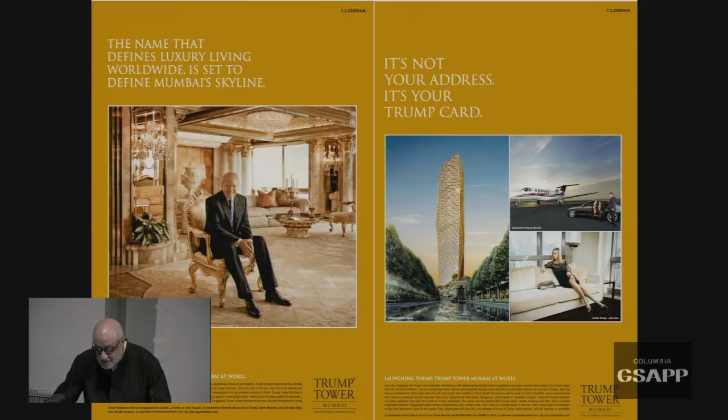Or even in the words of Karl Marx, who said about capitalism, to quote him: capitalism has conjured up such gigantic means of production and of exchange that it's like a sorcerer who is no longer able to control the powers of the netherworld, whom he has called up by his spell.

And even in Mumbai, we haven't been spared by this gold-plated, gilded Trump Tower. Spatial inequity is critical, and as Charles Correa, the Indian architect, wrote, to quote him: "Today the amount of urban space one controls is directly proportionate to one's status or income."

It has no connection to actual family size. In fact, poorer people most often have larger families. This space differential, therefore, cannot be justified in human terms and only in economic ones.

In Australia, in urban areas until at least the 1980s—something I verified a few months ago in Sydney—every family could have no more than a quarter acre. Australia was locked into spatial equality, and thus clearly a society that detests elitism.

But equity is not a quantitative measure alone. It has subjective dimensions of access. Sometimes perceived access, or an illusion of equity perhaps, is productive. Plot divisions that were the very fabric of a city are a great contributor to this, and by extension, architecture. This is what I think designers can play a role in defining.

Martha Chen, who works on informal economy at the Kennedy School of Government, advocates in the context of economy. To quote her: 'What is needed most fundamentally is a new economic paradigm, a model of hybrid economy that embraces the traditional and the modern, the small scale and the big scale, the informal and the formal. What is needed is an economic model that allows the smallest units and the least powerful workers to operate alongside the largest units and most powerful economic players.' This is a project I'll share with you in more detail as we go on.

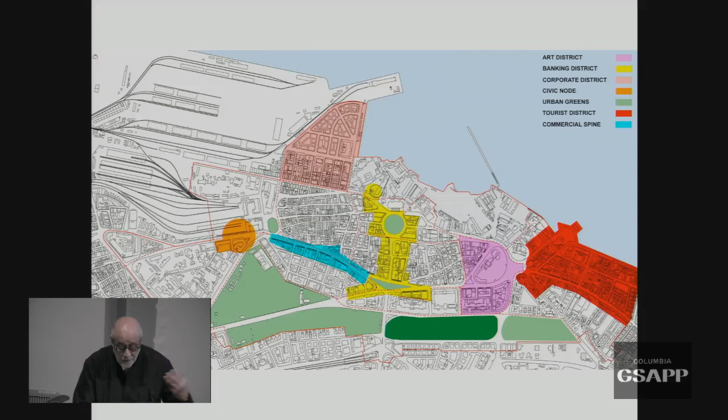And of course, they find their way also into advocacy. Here we worked as advocates for a whole decade, trying to organize citizens groups on the ground to preserve areas, to recycle buildings, to generate new economies for these places.

It also led us to looking here at the Prince of Wales Museum, a very particular precinct in the center of this historic district, engaging with architecture, contemporary interventions which were reversible, but transitional in what they were trying to do to the problem that exists. In this case, a visitor center, which became a gateway, which housed security and many other things.

At the other end of the spectrum, we're also interested in urban issues. As Ken was describing, this was a massive project across Harvard University that documented an ephemeral megacity called the Kumbh Mela, involved 7 schools, and landed up in this publication.

And then as advocacy also extended itself into the Venice Biennale as an installation to talk about these incredible landscapes which have become a reality in our world, all the way from refugee camps to places for celebration or the military. This has resulted in a very recent book called Does Permanence Matter?

And this maps about 300 cases of ephemeral landscapes such as this, with 3, 4, 500 million people on this planet spending their daily lives here.

And Andres Lepik took this and has now converted it into an exhibition at the Munich gallery, because in the conversations in Germany, this is something that resonates very deeply. It's a 5-month-long exhibition with many conversations around it, and a very beautiful installation.

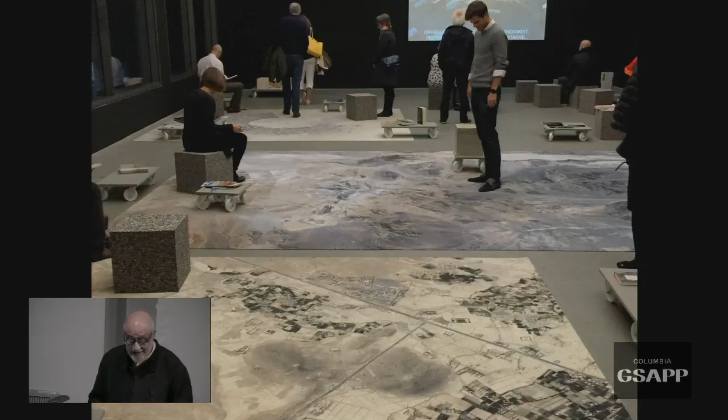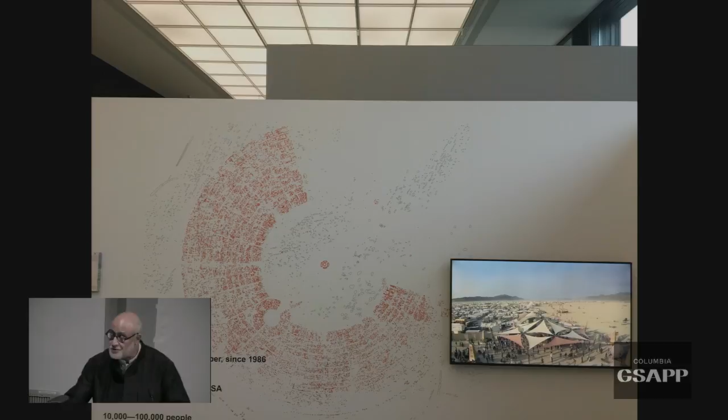These are carpets that were made locally there, which actually have maps of these ephemeral settlements that you can look at and sit around. We've also digitized things like Burning Man, and all of these settlements, so you can begin to pull the metrics into the planning discourse. So we can actually measure densities and measure distances. You can create metrics to understand these.

And this is extended now into a broader project, which is looking at urban India. In the present official calculus of the government, India has something like 7,200 and something towns. And we're making an argument that there are actually 32,000 settlements.

And it's a condition of flux, because the argument we're building in the research is India is 60% urban for 6 months of the year and 40% urban for the other 6 months. So the flux of 350 million people, how do you deal with that in terms of design? It has huge implications for housing, for example, and rental markets, even in the big cities, because you have a seasonal change that is mind-boggling.

In India we shouldn't be talking about smart cities, we should be talking about smart agents, because there are 350 million people moving between rural and urban, this blur where we can't even use those binaries any longer, making the biggest transformations in the landscape and culture of these settlements. But looping back to architecture, which is what I'll stick with, I wanted to use that as an introduction to talk about my spheres of concern as I come to my spheres of influence, I hope.

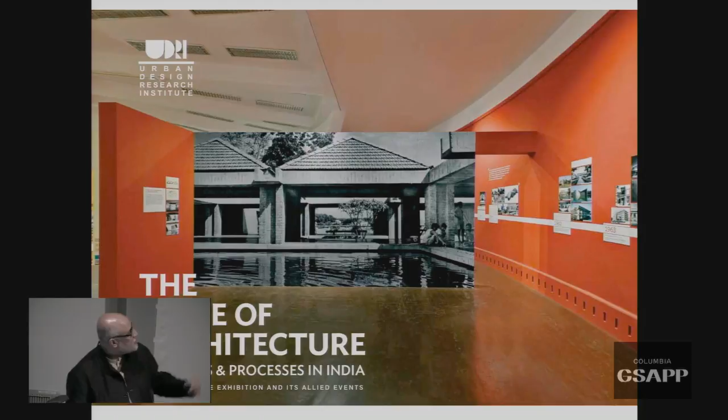From Ken's book, a decade later we made this book on architecture in India since 1990, when we liberalized our economy, because we began to see very particular patterns emerging. This became a major exhibition at the National Gallery of Modern Art two years ago, which mapped architecture in India since 1947. Many interesting things came out of it in my own learning. Besides capturing the seminal publications and things, this was a book that Ken did the foreword for.

At Independence, we had one school of architecture, which is this yellow line. Two years ago, we had 480 schools of architecture. It's an amazingly mind-blowing trajectory.

What you see in blue, from 1990 when we liberalized our economy, real estate became a more formalized sector, and you see the growth of schools related to the growth of real estate. Actually, the demand for architects is inversely proportionate to the growth of real estate, because when real estate becomes an organized sector, large developers build large gated communities using one architect, one landscape architect for multiple projects. So 600 homes get built by an in-house architect, often. In another paradigm, it would be a completely different economy as far as the profession goes.

So we shouldn't be having more schools of architecture, in fact, less. There were many things like this which had to do with criticism, documentation, education, how many PhDs we have. There's a very intense documentation of the state of architecture.

One of the things it taught me, and I'm leading into our projects because these are learnings that loop back, is that there was a variety of protocols and processes through this diverse country which needed to be looked at. It also taught me that 90% of the architects in the country, we didn't include in the exhibition, and it created a huge controversy because all our friends were left out, since we said no single family homes. By just doing that, we eliminated 90% of the best known architects in the country. It was a really good way to make enemies.

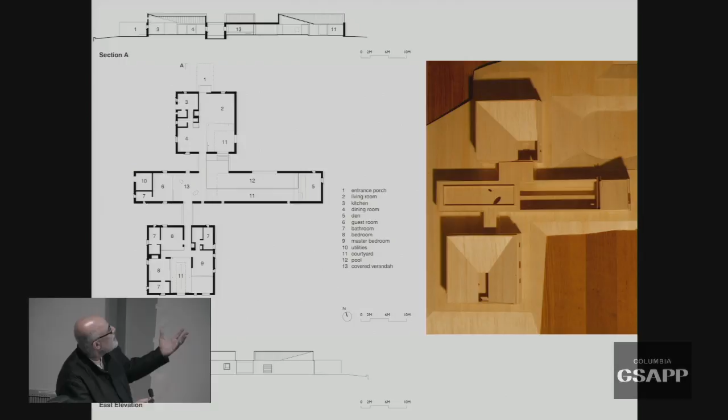But it's also incremental in what it suggests as a configuration, so it becomes also a paradigm perhaps relevant for the growing middle class. The disaggregation allows it to sit in this rural landscape more lightly, rather than the kind of neoclassical villas being built, or even in terms of materiality, a simplicity which doesn't polarize what's around it. So the scale becomes an important issue as you approach the house.

It's a series of courtyards with very simple materials. That's what the configuration is. The pool is very discreet - this would normally be out there, but that's a form of polarization where you have these hedonistic engagements while gardeners are toiling in the lawns, mowing the lawns, etc.

So how do you make all this discreet but yet create a kind of ambience and atmosphere that sophisticated urban people might enjoy in a rural landscape? These are the 3 bedrooms that can become one large room, designed for the monsoon condition in how it collects water and opens out to the landscape. We've emphasized the protection for the window to counter weathering, an important issue for us in these contexts. He didn't want art, so we've got colored glass which registers the sun as it moves around the house, throwing shadows, and courtyards that relate to the outside.

In larger conservation projects, which is also an interest, this is the Chowmahalla Palace in Hyderabad - that's the Char Minar, for those who might know Hyderabad. Here it was complicated because the patron was the Nizam's family who wanted to resurrect the palace. The clients were the state tourism and others who wanted to bring this as part of the economy, and the users were the citizens of this dense part of Hyderabad.

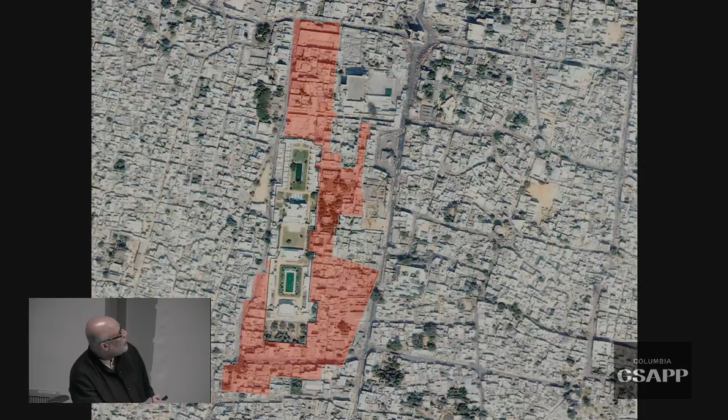Why it was a contested project: this is the inner city, that's the Charminar, and what you see in red was encroached upon illegally. This involved lawyers, stabilizing the edges of it, and sometimes violence because people felt they were being threatened. Of course, we didn't get rid of anyone living there, we just stabilized the core to create a large public space, and posing it as a public space changed the narrative.

This is the state we found it in, the usual measured drawings and mapping. I think we had about 120 measured drawings like this with condition reports and all of that. Then even the operational client breaks down because you work with general contractors, you work with craftsmen who can work with lime. That column takes 3 months to build. It brings a different imagination of time in the way you engage with these processes and understanding these kinds of places.

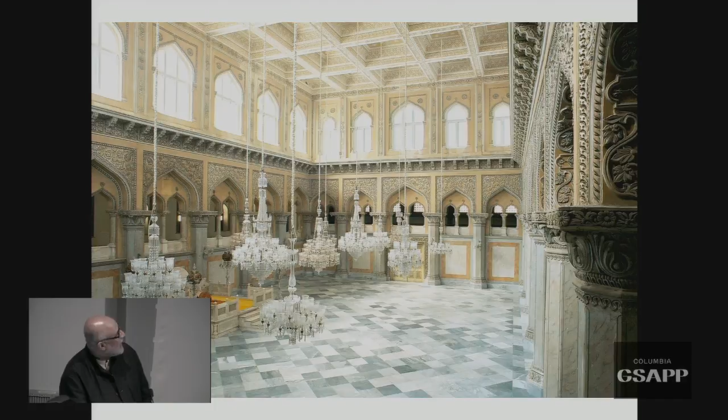This is the main Darbar Hall. That entire ceiling you see was reconstructed from scratch because it had collapsed, the chandeliers - it had many components. So even the craftspeople here, it's such a wide range that you can't see it as the entity of the contractor.

You're negotiating with about 12 or 15 people. It's become a museum on the legacy of the Nizam's family. It had a very low budget, so it's not highly air-conditioned, and it's sort of quite casually, informally articulated as display.

In institutional buildings, there's another sort of dynamic that happens. Here I want to share with you the architecture school in Ahmedabad, which Ken mentioned. I just want to dissipate that - it's not under threat. This is a campaign where there's a lot of politics involved because there's a change in management, and it's triggered off a whole discussion. But I'm glad it did because it makes us aware of this.

This is a building designed by Doshi. I studied here, it's a beautiful building, a beautiful campus. We were invited to do the first building, which is not a Doshi building, and that itself was very controversial. But anyway, we engaged with it.

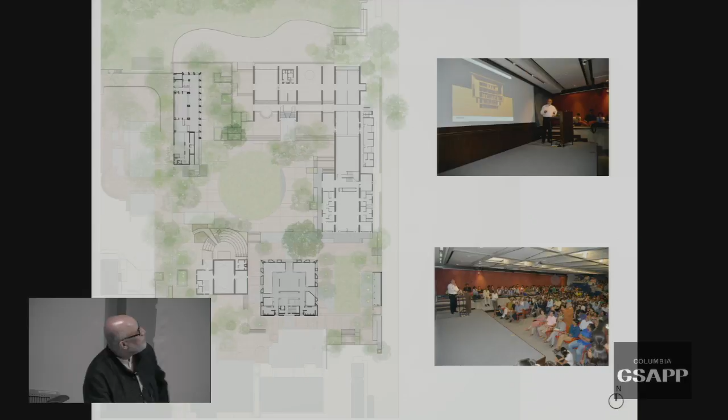That's what the campus looks like. And this is the image I showed you, but these are buildings designed by Doshi in the first phase, which are incredibly beautiful. Then there were a number of buildings added as different donors came about, and the rest of the campus is really quite chaotic and incrementally developed.

And the site we were given was a pivotal site - these were all buildings that existed. We were given the site, and the program required a 6-story building by the master planners, and that was unbelievable to imagine, but we had to fulfill that requirement.

So we created coherence in the plaza - we paved it. This is a new cafeteria and student facility that's been added, again to give coherence to the core and create relationships across. This building also begins to define this plaza, which connects other schools that are quite disparate in terms of building. So it's like a pivotal building.

In a case like this, the patron was the Ahmedabad Education Society, which has a wonderful tradition because they were patrons to buildings by Charles Correa, Doshi, even Louis Kahn and Corbusier. So very enlightened people we could go to when we needed it.

The client and operational client was the president of the university, who also happens to be an Aga Khan Award winner, Dr. Patel. And then we had users, the faculty and students. That was the difficult group to deal with naturally because in an architecture school, everyone and his uncle has an opinion about what should be done.

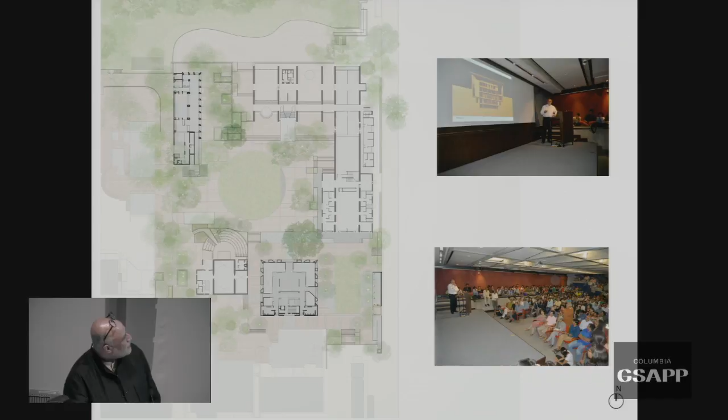And this was the footprint we were given. So within that, we had to accommodate what would have been a 6-story building.

Naturally, for us, it was an intervention in a modern historic context, one that I'd studied with and learned so much from. So the first decision was: we're not going to go 1 inch above any of Doshi's buildings. In fact, stay a few inches below, just as a sign of respect.

And so it meant actually trying to come up with a building that went 3 floors below the ground. That was a challenge, but made a lot of sense in the context of Ahmedabad because it's a very hot climate - like the stepped wells - and going down there, the geothermal advantage is so great that once we could get it past the clients, it really was the right thing to do, I believe.

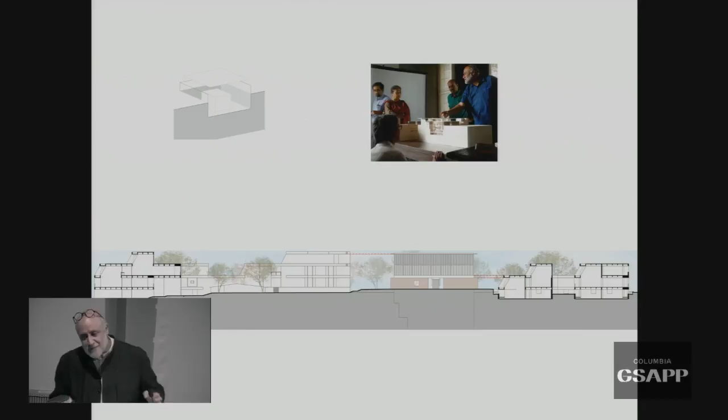This was a model I presented. I had the other half of it closed, and I went to them - I didn't tell them we were doing this. I just showed the model that was only 3 floors above the ground. They said it was impossible to fit the requirements, and then I waited for this discussion to heat up. Then I removed the other half and they saw the building, and there was silence for 10 or 15 minutes. Then they finally slowly got used to the idea, because it's a challenge technically to do it. But I think that made a big difference.

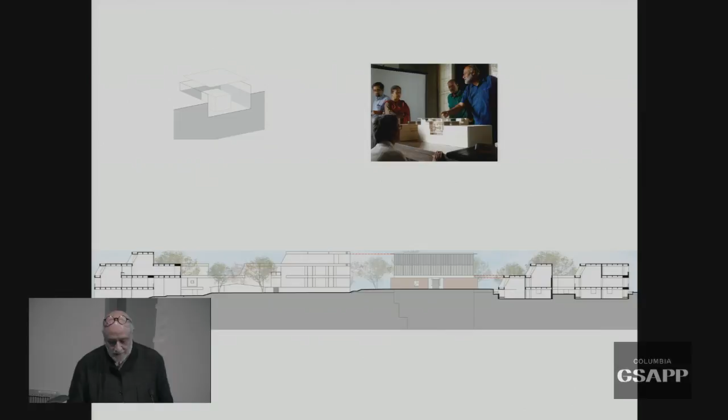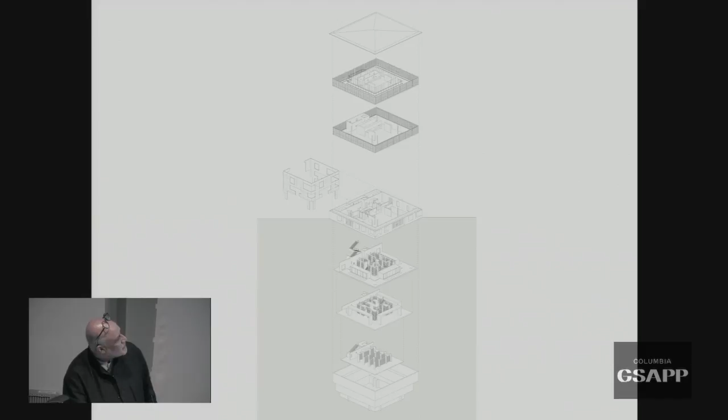There's a core within, and there are 3 buildings. One is the skin, one is this sort of thing that encloses the core, which is like 4 floors of book stacks, and then 1 floor which is just the archives. But the book stack is the central thing, and each section of the building has its own logic in terms of floor heights, so you get a very rich sectional quality. That's what it sort of feels like.

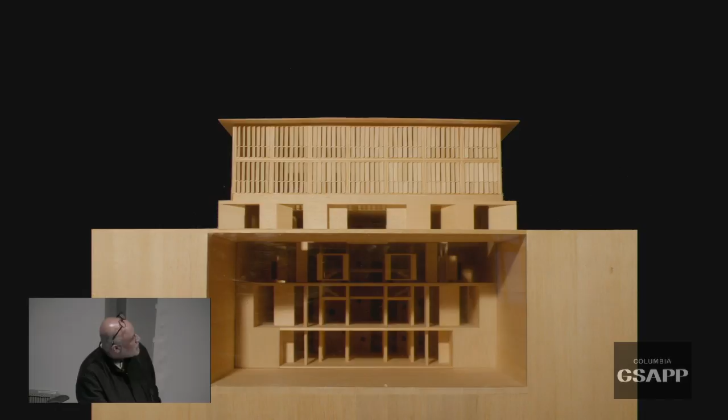There are a series of courtyards that take light all the way down, I'll show you some images. In section, the light comes right down, there's skylights which bring it down here. This is archives, so there's no natural light there. And this is the book stack, which is like a central bit in the building, and along the edge in these courtyards are carrels where you have a lot of good light to read.

So these are the carrels where students and PhD students can sit. This is separated, so you enter it through a series of bridges. This is a building that sits with the courtyard separating it and a whole skin that goes around it. That's what it sort of looks like.

These are movable fins and a very deep base wall. They become totally transparent, they're operated. There's a catwalk from the inside, and you can adjust it.

And now they're going to use the building, that was one of the brief. How can students learn from the building, and how can one use newer materials? Because Doshi's buildings are in brick and concrete, which was the buildings of a time, and they're very beautiful and robust. But the idea was also students today confront glass and gypboard and a whole range of new materials in liberalized India. So how do you also demonstrate to them a use and articulation of those materials which might inspire them in different ways?

In fact, now one course at the university is going to be on this building, where climate is going to be taught through this building with students mapping it, and we are developing a manual with the faculty for how the building will be operated. The louvers set twice a day for different weeks of the year, depending on projections of climate, sun movement, etc. So it'll really become a living building.

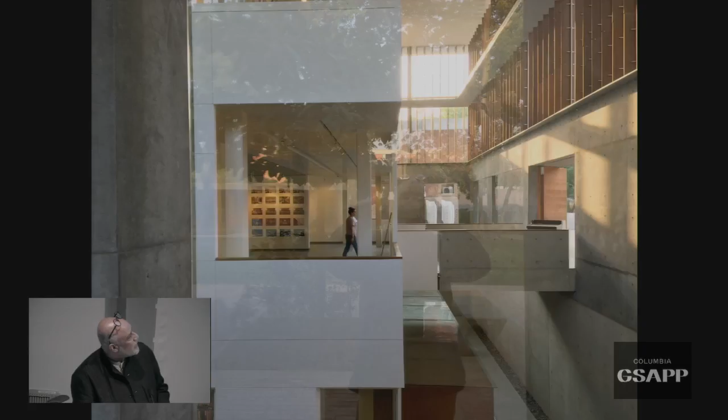This is the common area which students use for workshops and exhibitions, which is just open, non-air conditioned. The air goes through, it's well shaded. That's the kind of sense you see as you walk around the building, because it's central. You have these openings and you get glimpses of the inside.

And then as you go below the building, you have a different logic of just 8 feet or 2.4 meter heights, which is the book core, which I'm now going to show you. These are the carrels, which open out in these courtyards, which are going to be furnished with ferro-cement design furniture, being designed by students and things. These are the carrels and the book stacks.

These become places people who want to speak step out so that you don't disturb the library. It's very cool, protected from the rain. It has sun in the winter. So these are wonderful places climatically to sit in.

You're always aware of the different levels. So you're now at a level which is minus half, or two meters or something. You look down to that level and you get a sense of the level above. And these are all these mezzanines. I love this image because obviously it's a comfortable place—lots of students sleep there.

These are the kind of book stacks within that central stack, where sectionally you're simultaneously aware of at least 3 levels, about a 12-meter difference, but broken into slabs sectionally, so there's a sense of intimacy without different zones being disturbed.

What you see here is at -8 meters below the ground, and here you get a sense of all the mid-levels, the courtyard level up there being the highest. These sections work with tables and little rooms, so there's a lot of intimacy. The spectrum of spaces is enormous, and that's what we tried to achieve in the building.

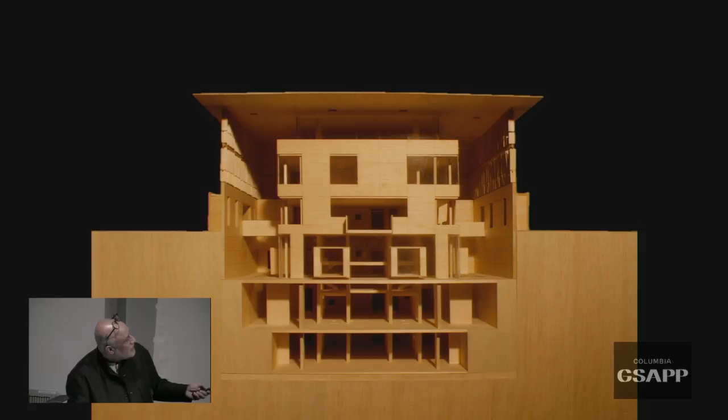When you go down to this level, it's much quieter. The idea here was to create a quiet space that people could fill their thoughts with. It's not very heavily detailed, in fact it's completely sparse. All the services are integrated in the book stack, so except for Wi-Fi routers, nothing else is on the ceiling.

This is what that area feels like, and this is the modulation of light as you adjust the louvers. It even gets as luminous as that. This is 8 meters below the ground, so you basically don't need artificial light if you have the sun up there.

These portals are the structure, and that's it—there's a Wi-Fi router there. It's very sparse, it's very quiet, it's just the light that modulates, giving you a sense of what's changing in the atmosphere upstairs. The whole structure is supported by these 3 or 4 portals that go around, and it's sparse except for the skylight.

The corners are rooms, like smaller rooms, so again you have an intimacy of scale. This is the furniture going in now, these are the corner rooms.

Now we'll go up to the top, which is much more luminous, open, white, intimate, and very transparent when it's opened. These are the reading rooms and reading facilities, which have a completely different ambiance where people work. It's going to be open 24/7.

You have outdoor spaces where furniture will go in. These are meeting rooms outside in good weather that people can use so you don't disturb the library. The louvers, that's the catwalk, which has a thing for a harness—these are just construction workers doing it.

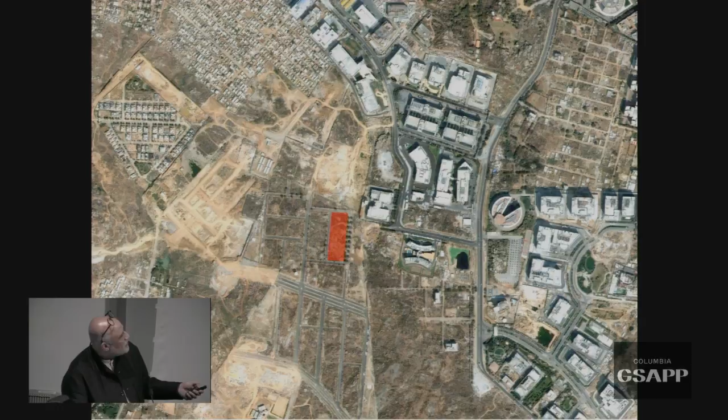This is in Hyderabad, in Cyberabad, which is the high-tech area. This is an early Google image—now this is full of offices. That's by Mario Botta; there are many other buildings by different architects here.

We were given this site for an infrastructure company, a high-tech infrastructure company that has all the equipment wired. What they do is monitor through this control room projects happening in Jaipur—trucks have cameras, they're kind of high efficiency.

And they, of course, wanted a glass monster. This is what happens in Hyderabad. This is Mercedes-Benz, and it's a glass building. But what you see is the nets, because this was when the states were being divided, so there were riots like every second week, and a glass building is what people destroyed. Vendors who were selling you curtain glazing actually gave you a whole choice of fishing nets. If you took blue glazing, you could take blue fishing net or white fishing net. So the fishing net and its fixing details, the stainless steel clamps, came as part of the outfit of the curtain glazing. It made you think that these images that globalization brings and what people identify with are so compelling that you're willing to go to these sort of heights.

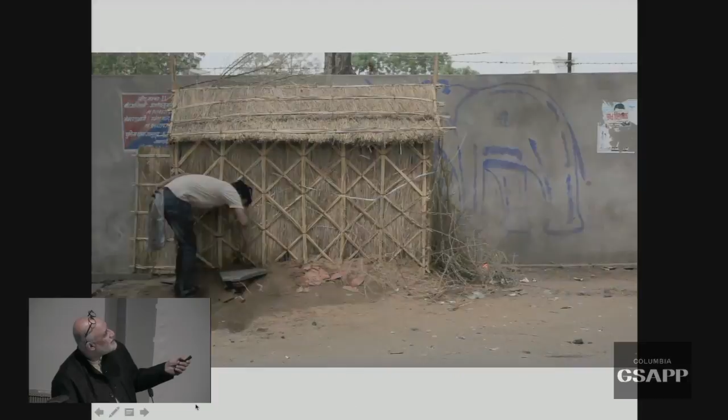We were very much inspired by this little hut. There are about 100 huts like this put up in Jaipur. That guy works for the business association and the government partnership that puts these up. They're water coolers, put up in the summer. When he puts his kettle on, he's open for business. It's clean water, which is very cool. People come, say hello. There are no plastic cups, they cup their hand and drink the water. It's just an amazingly inspiring thing that happens in Jaipur.

And they set it, and every once in a while he comes out and humidifies it with water. So through evaporative cooling, the hut stays very comfortable. In the hut, he has earthen pots, which again through evaporative cooling keep the water cool and clean. It's just a very beautiful experience. This blew us away, and we began to document it and made a video and measured temperature and the beauty of this. We said, how can this inspire us to make a building in Hyderabad, which has an equivalent kind of climate, dry and hot?

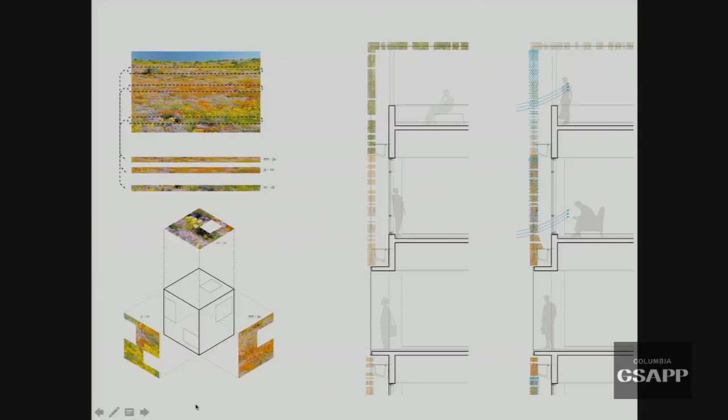So we did this building, which is a 5-story high garden. It's not a green wall, we haven't stuck the green on the wall. It's actually a performative screen, which is humidified, and it allows the air to go through. We couldn't get a LEED certificate because we didn't seal our windows and didn't bother with air conditioning everywhere. But anyway, now India has modified the LEED sort of thing with GRIHA and many others, which look at these sort of other questions that are more relevant.

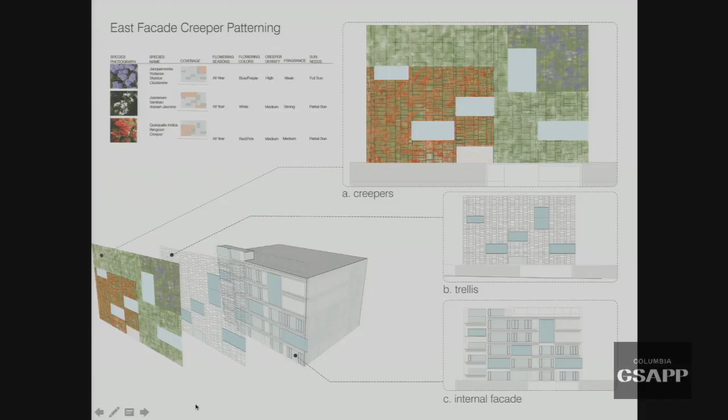So this is where the misting happens. The facade acts as, and then you have 3 layers, one is a trellis on which the facade grows. We tested different plants and saw how they grow, so every facade can be different, and you go back at different seasons and the building looks different. It's also a case of impatient capital - these guys wanted the building in 24 months. We negotiated with them that we'll take 3 years to grow the facade.

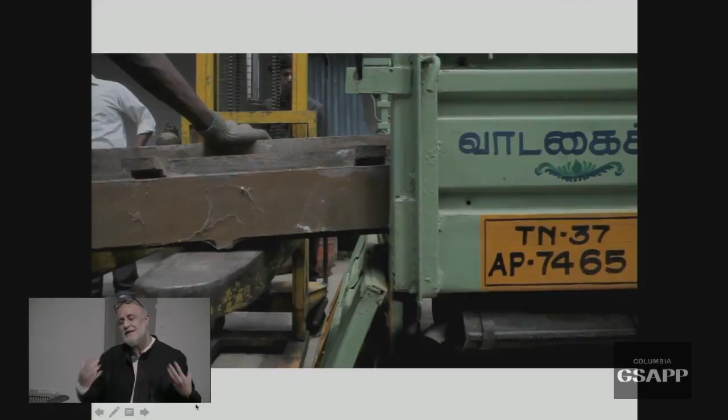They agreed. The cows went in to make the building sacred. The scaffolding was yet up. Our trellis was made through a small contractor near Hyderabad, which helped him set up a business because he only bought one mold. So again, this question of even craft - we seem to fetishize craft when it's used for a very small spectrum of materials like wood and stone.

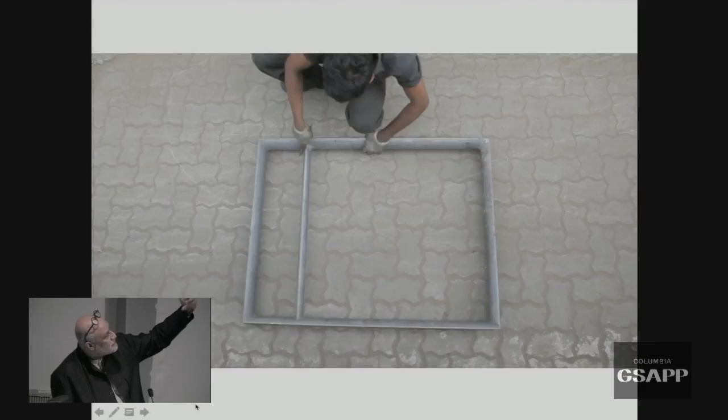The idea here was how you take a material like aluminum, in this case recycled aluminum, so that's why you have different textures on it. Particular alloys gave us a texture on this trellis so that even if the plants were burnt out, the trellis would look beautiful. Very small components, all handmade in a 20-person kind of plant that was set up. Many women worked here. This is a large anodizing plant, and you can see the texture on it. It's got a lovely patina, which came from the recycled mixed alloys of aluminium, and 2 people could carry it.

It looks heavy, but it's very light. 2 people assemble it. Over 2 years, it was assembled slowly, with the plants and the misting system on a different grid, for different plant needs. But the misting is to cool the building, not for the plants - the plants are actually watered with drip irrigation in hydroponic trays.

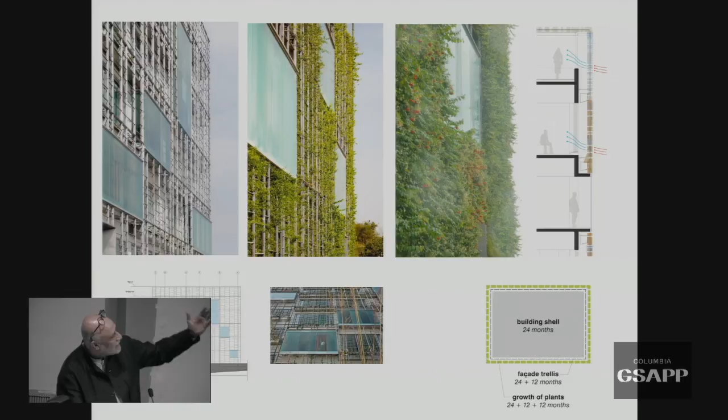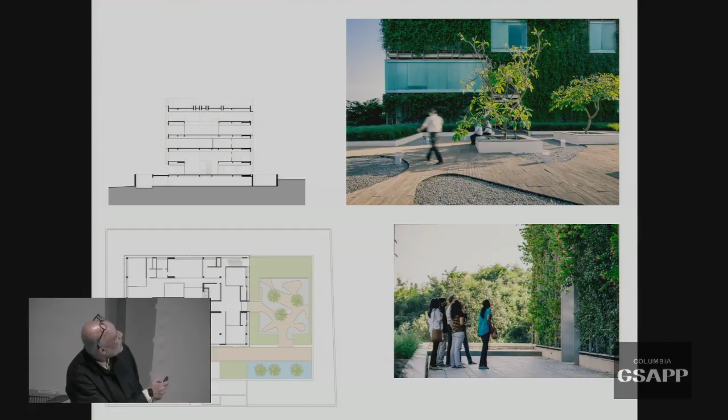So this is how it sort of becomes a woolly monster - you have to give it a haircut. It goes back and forth, so you've got to kind of control it. There's a base where the parking and the entrance is, and even sectionally it has different volumes that look at how hot air can escape. This is the tendering department, so that's the only one that's sliced off because of privacy. And the podium creates social spaces for people to congregate in, where the flowers bloom.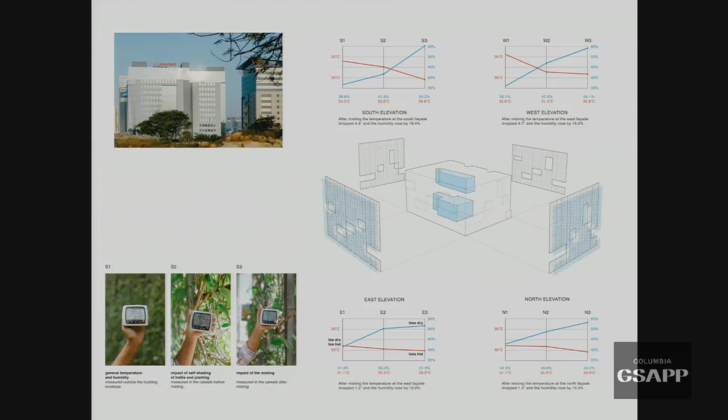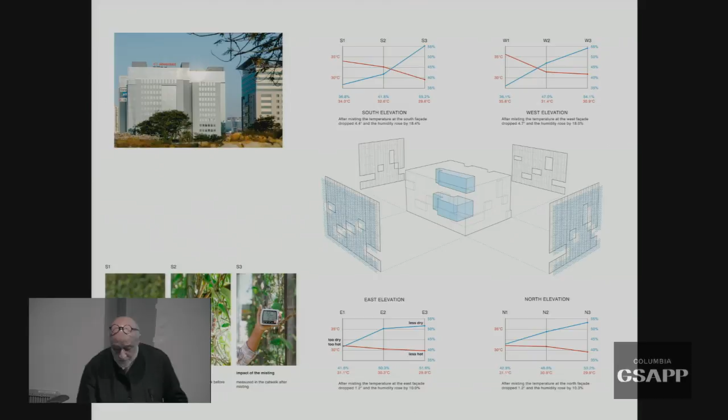Sectionally, it has its own sort of intelligence in terms of how it's articulated, both for function. That building got a LEED certificate and we didn't. We've been mapping it, and we did this sort of intuitively, I'll admit. My friends who are now really into this stuff have made me measure temperature, and we're giving them data so they can analyze it now that it's been in operation for 4 or 5 years.

But that's sort of what it feels like within the building. I use this slide and often tell this story. This is an intern from Panama City who took this image, so it's not a staged image, but it made me think very deeply about what the building was about.

This is the Marty Chen quote I shared, that people of different economic standing. The gardeners here are the poorest paid people in a corporation like this. Normally you'd see them toiling, the boss would go by in tinted glass, a foreign imported car, no eye contact. Here, the lowest paid people, the gardeners, are in your face, you negotiate with them all the time. But also, the identity of the building depends on them, because the facade depends on how well the gardeners operate.

There's a kind of empathy here, but empathy is, I think, not enough. I think this is a very particular situation. It's made me think how in the US, for example, people who collect trash in the evening from our university, can they be surfaced and in ways that make the role they play more dignified? Of course it's more complex. Here, because the garden is linked to the identity of the building, I think people get a kind of particular position within that hierarchy, which is amazing.

This woman wouldn't have worn a sari if she wasn't in the face of her bosses. She would have worn much more ordinary clothes if she was just working in the garden. That reversal I think is very interesting, because they're really the heroes of the building. Here's someone working, there's a kind of coexistence. There are blinds there, so you can put the blind down if you want to cut somebody off, but that doesn't happen. If you go to their website and other blogs, it's amazing the kind of friendships that have developed. Again, unintended. We didn't set out to design to do this, but it's feedback we're enjoying now to address things in the future.

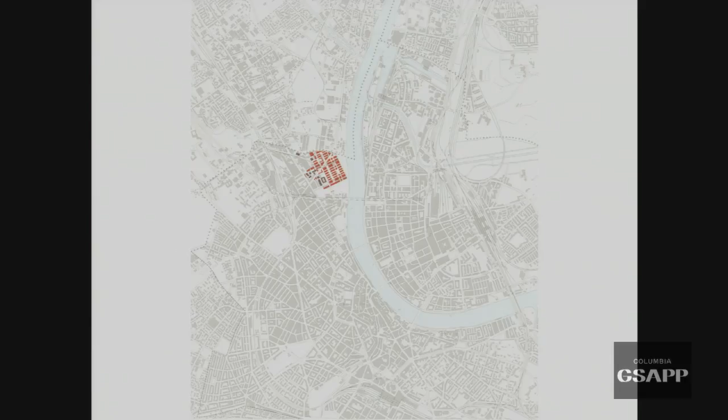This led us to extend these ideas, this idea of the building as a social condenser, for a building we were asked to do in Europe. This is the first building we've done in Europe, on the Novartis campus in Basel, and that's our building. It was one of two on the river. We were lucky to get that sort of site.

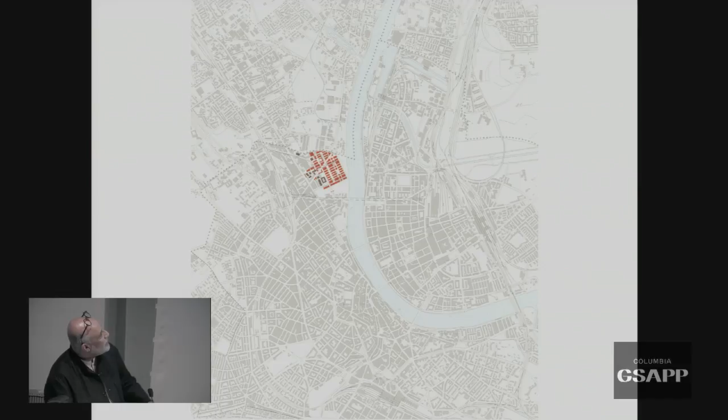It's a site plan done by Vittorio Lampugnani, a very strict, rigorous, European ordered site plan. So the footprints are very determined, and the envelope is determined. I suppose they had one triangular site, so they gave it to Frank Gehry, but everybody else got the big rectangles. That's what it looked like in progress, our building was there. Now they've developed the whole landscape, and it's transformed a lot.

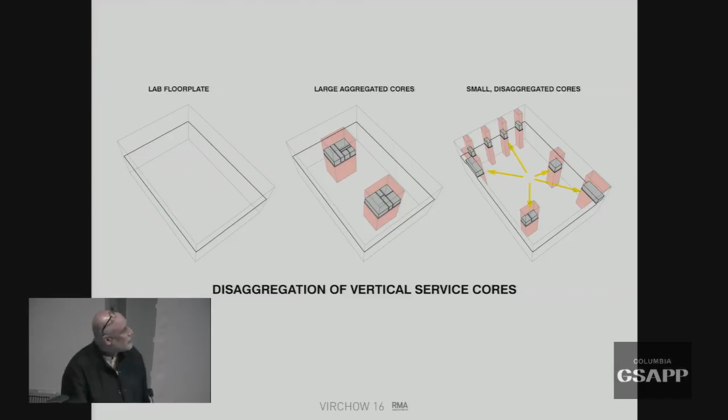This is an old image, and that was the conceptual model we first presented. This was interesting because we studied all the buildings, since they'd documented each one in a beautiful book. It was remarkable that the footprint was fixed, and everyone was given two ducts for the services, because these are labs, so the services are incredibly intense - these were large bundle ducts.

We felt that when you do that, you create a zoning, you create hard thresholds, you segregate lab from administrative staff, a whole hierarchy of people in any organization. This was difficult to do with the Swiss, but with the 10 or 15 consultants we negotiated how we would disaggregate the ducts, so that would give us a clean footprint where we could modulate space in much more interesting ways.

And finally, they agreed with circulation. For fire, it was actually even more efficient, and they accepted this. It's the only building on the campus that broke away from this.

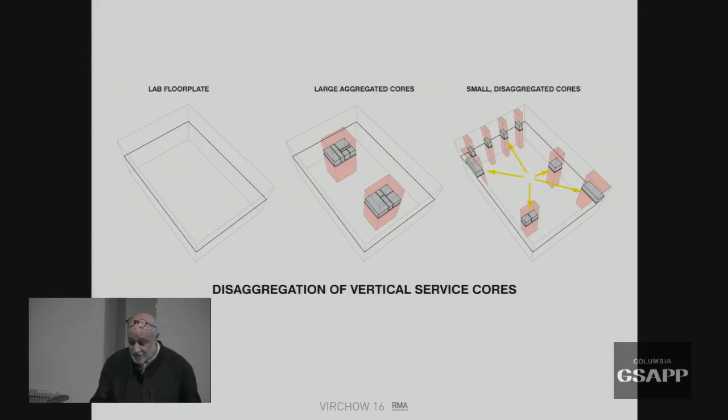The other thing we did, again, I think coming from Mumbai, where you're always trying to manipulate space, this comes naturally to us. Most people accepted the envelope, accepted that because the labs needed 5 meters, you would do 5 floors, which were 5 meters, and everyone was in there. We questioned the idea that the administration, which didn't have heavy services, didn't need more than 2.4 meters, which means we could get more floors on one side, which means we would save area, which means we could have carved a courtyard out, which could create a wonderful space as a greenhouse, both for cooling.

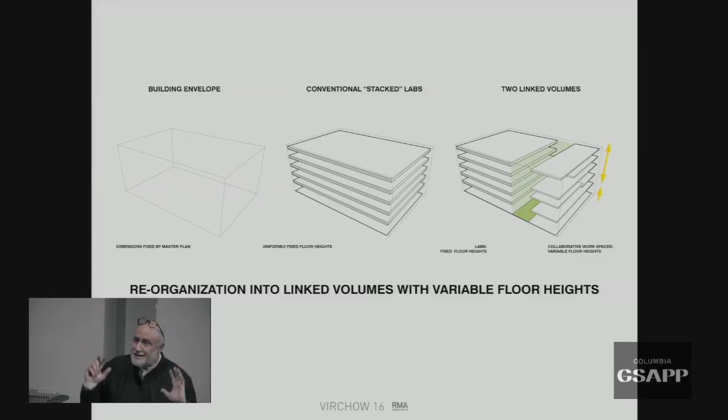And this building is all LEED certified. It's got complicated geothermal systems, but we thought we could add through the greenhouse a way of heating the building, cooling it with skylights that are openable. And they agreed to that. We were surprised. But these two little shifts opened up all sorts of possibilities.

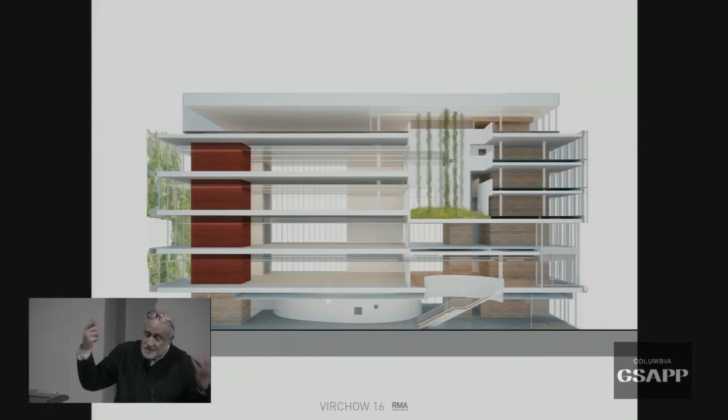So then we got a section where you had these shafts which were disaggregated, you got a garden there, and you got split levels because the levels varied. So like I showed you in the GSAPP building, you got these sectional vistas which connected more than one level at a time, which makes it a much more social space, because more people are making eye contact, more people are climbing only half levels to meet people, and so those incidents are much more frequent.

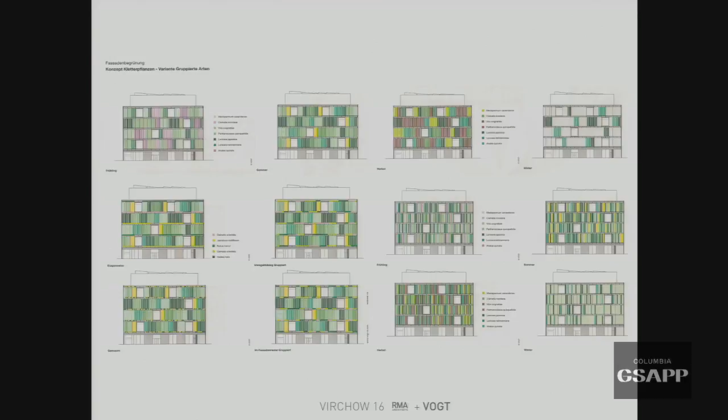We worked with Günther Vogt from Zurich to conceptualize this garden at the center, which would also be performative. On the facade, he created a registry of the seasons with 28 species, which would actually map and burn out, and something would bloom at any given time.

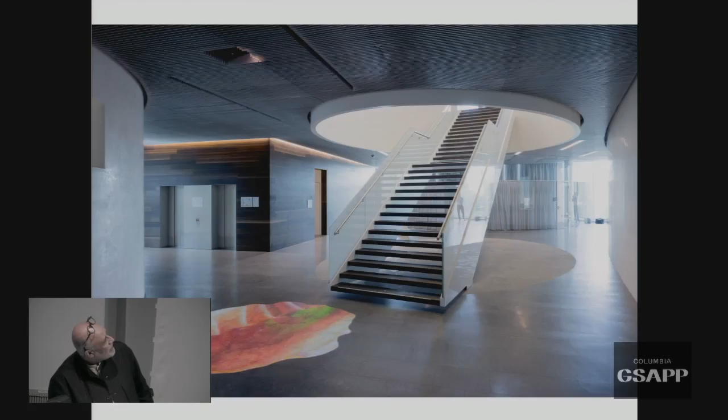The artwork, we collaborated with Pipilotti Rist from Zurich, and she created these video installations through the building. And they're kind of these warm showers of color that you walk through in the winter as you pass through the building. And so they appear in different sort of locations.

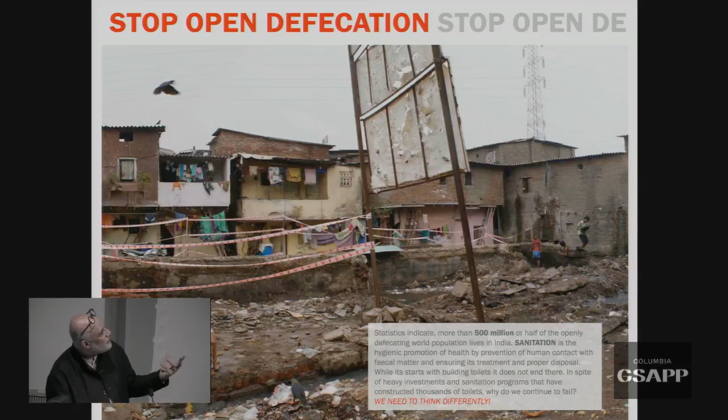Look at the white socks, the tie. He's going off to school, jumping over the compound wall, lives in one of those huts. And what it made me think about was he probably defecated in the open because he has no access to a toilet. And so to have someone that intact, what is the role? What is the agency of design? And so open defecation is like a massive, massive problem.

You might not read this so clearly, but I just want to make a point that India has got the highest open defecation in the world. It's way above any other country, even Africa, where we might think this would happen. Now, whether it's cultural, whether it's density.

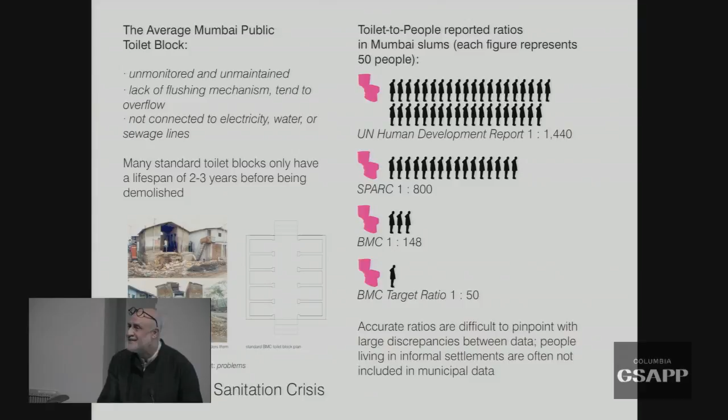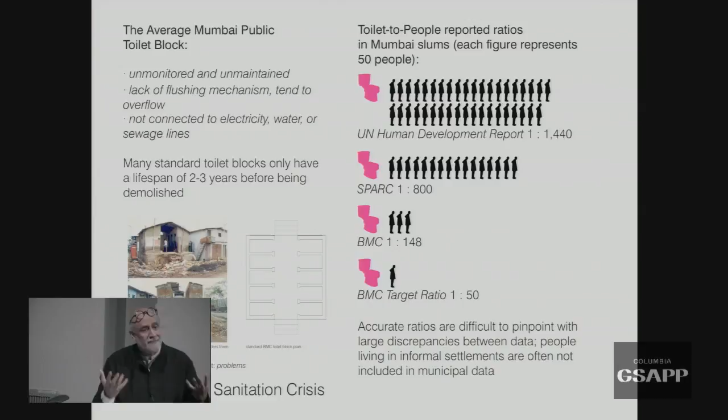Mind-boggling. SPARC, the NGO we partnered with, says it's 1 is to 800 - they have other ways of calculating it. The Bombay Municipal Corporation's aspiration, which means their target, is 1 is to 50, which means 6 families would share a toilet, which means you'd have to have a lottery every morning, or a system where once in 50 days you would be able to use the WC, which is ridiculous. It's shameful that even as a society we have an aspiration like that.

Our Prime Minister has made this a big agenda, and he said that he wants construction of toilets in every household by 2019. Amazing, really brave of him to have done this. But the question is, I think we as designers have to be part of this debate, because if I look at that, can I get a toilet to everyone by 2019? It's impossible. Totally impossible.

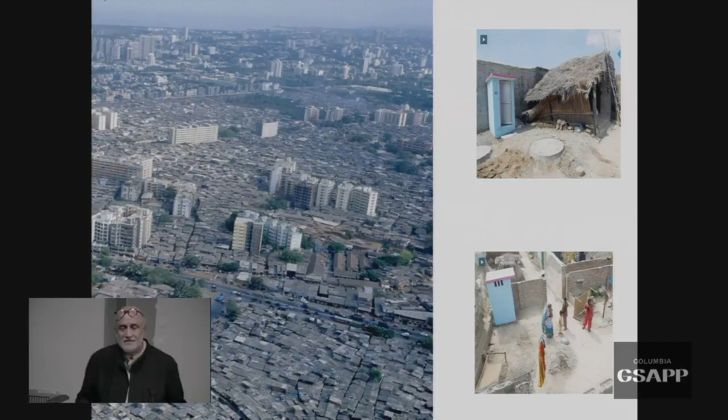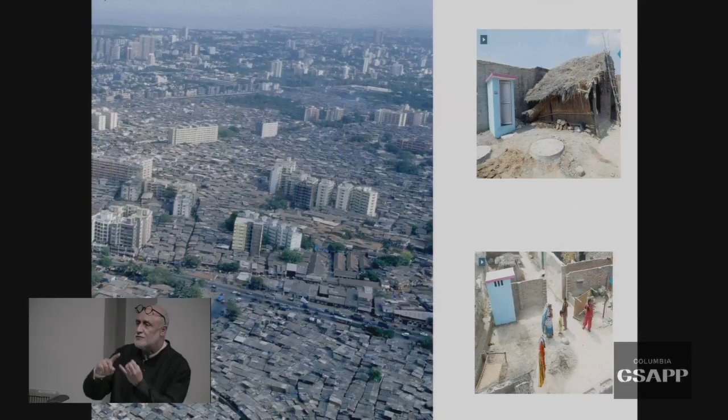So what is the government doing? They've got factories. They've said they've built 2 million toilets. They build these toilets. A truck goes around every village and dumps it outside the village. Research has shown that these toilets are the only solidly constructed thing, so it's used for storage of grain, jewelry. It's used for everything but a toilet because it's got no relationship to the house.

So the question really is that as designers, we need to think about transitions. We don't give enough attention to what it means to design for transitions because we think in absolute terms. And so the transition to solving this problem is community toilets, which is what the World Bank is doing, which is where we got involved.

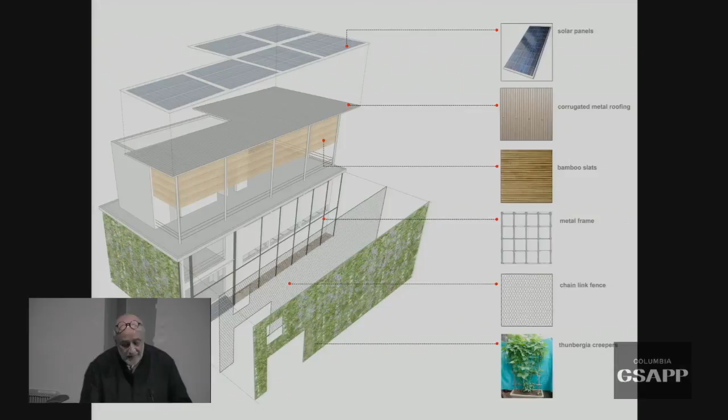This NGO, SPARC, that we worked with had been appointed to build 300 of these. So we got involved and began to develop a prototype where we'd segregate the men and women. We used a facade like we had developed, which would be flowers, so people might pluck flowers to use for prayer. That would be wonderful, being very idealistic.

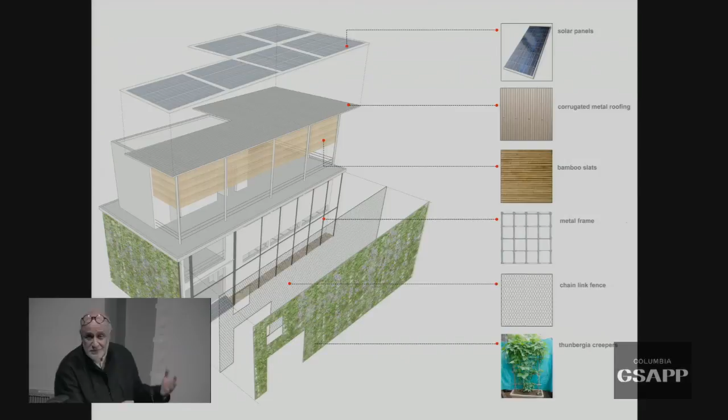We put the caretaker's house on top of the toilet. He got the penthouse, which is usually the lowest caste, which is also a politic there. The space here became a community space for children and women. I got a client to donate solar panels so we could get it off the grid, so children could study in the community space at night.

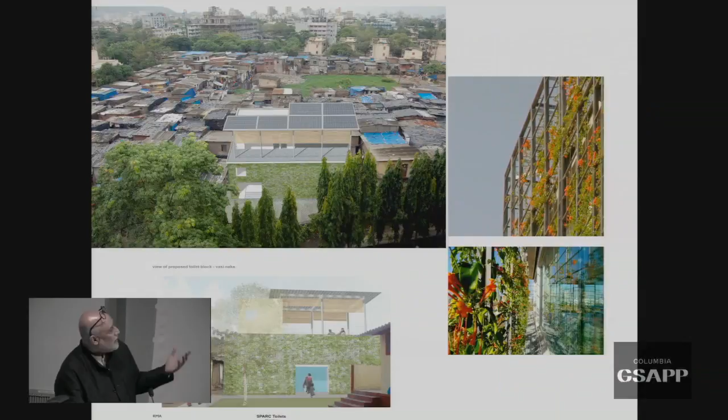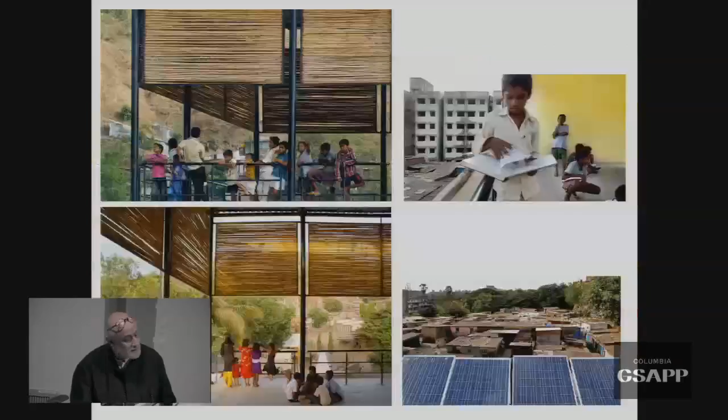It looked really great, and we started trying to build them. This one got stopped at the plinth level because the government said this is too iconic - we are going to be removing the slums, so why are you creating a community center? We tried building in many locations, and on the 8th attempt we managed to build one in a real hurry, with solar panels, in this sort of squatter settlement. It became a nice space, bamboo slats, very well protected in the rain.

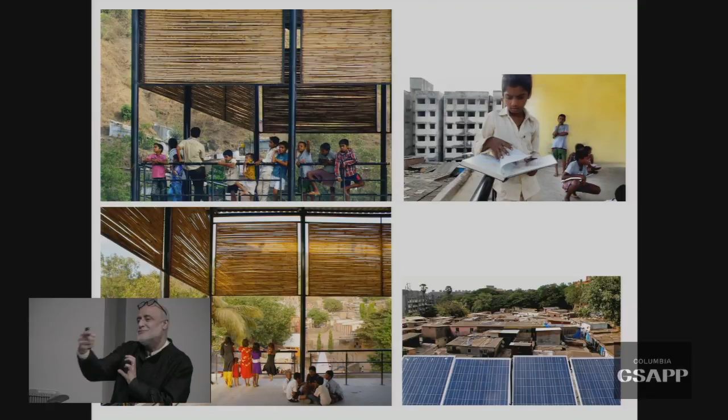Children used it, the solar panels went up. That's housing that was built 20 years ago by the government, which didn't manage to relocate the slum dwellers, which means this is a problem of transitions, and how do we design for transitions becomes an incredibly important question. And then I went back 6 or 9 months later, and it completely failed.

Complete disaster. Of course, Beckett tells you: fail again, fail better. So we entered a competition by the Gates Foundation and won the first prize. It was an international competition where we embedded it even more, made it reversible, so it could be dismantled and the material recycled. We put shops there, we put a laundromat into it. It was a wonderful idea in the way it worked.

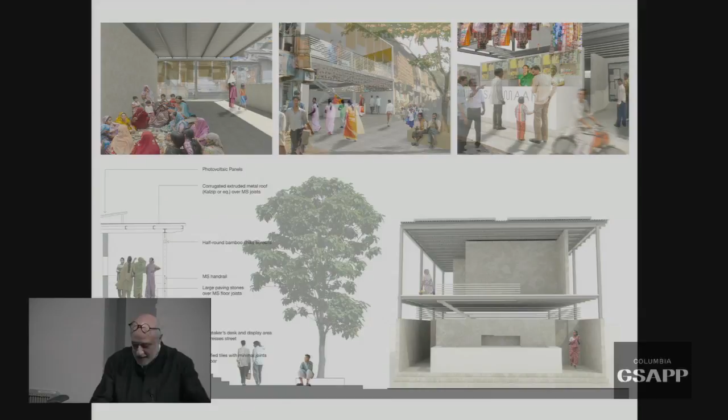But again, we weren't successful because, I don't know, the supply chain to make it happen wasn't on the ground. So we won the competition but couldn't make it operational. Symbolically, we said it should be across from the temple, etc. So this is a project we are pursuing.

I think it questions us in terms of our disciplinary engagement on the notion - does permanence matter? It's become a default condition when we design. In today's world of flux, we need to think about those imaginations. In the same way, we think in terms of absolutes when solving these problems, whether it's housing or public sanitation. How do we imagine the space of transitions? And transitions sometimes take you away from a kind of linear trajectory. The challenge always is how you come back to target, but I think it's worth designing for.

I'm going to now share with you my last project, and the most complex one, which is for these guys who are mahouts - they look after elephants. This was a competition in Jaipur, which again we won. And here, of course, this is really a complex project, now been going on for 12 or 13 years.

Here, these were differentiated in mind-blowing ways. The patron here was the chief minister who called for the competition and awarded the project. The clients were the Public Works Department and agencies that changed every 6 months depending on who was in power, which I'll show you in a second. And the users were the elephants and the mahouts. In this case, we kind of negotiated all three, which is why I think the project is happening.

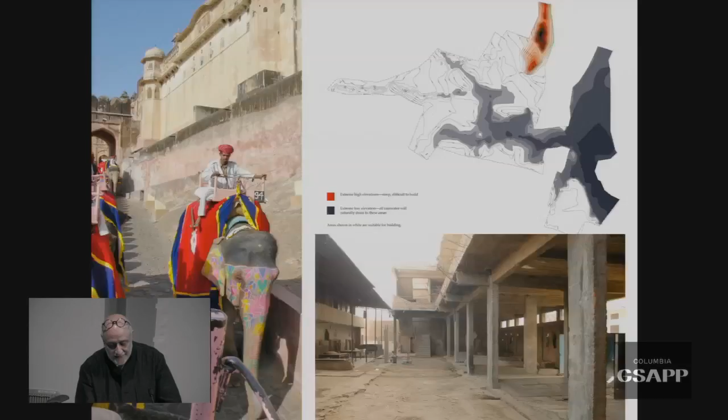I presented this at Columbia 7 years ago, and I remember Ken reminded me today - I used to go to the site after the first 2 years with my resignation letter, because every time I thought I'm going to resign. I'll show you what that meant. Of course, the Pink City, Jaipur, tourism - elephants became very much part of that whole landscape. They take tourists up to Amber Palace. They get painted, and because there's no water their skins discolor, because these are toxic.

These elephants go rogue - it doesn't get reported, but they've killed tourists because they go rogue in the summer and can't be controlled. The government created housing for them with the mahouts living up there with garages for the elephants. That doesn't work. The mahouts all moved down because the relationship between the mahout and the elephant is incredibly complex to build and control. So this was a complete failure.

So they had the competition. This was a piece of land which had been quarried by sand contractors, almost initially unbuildable. Of course there was a lot of research into how much water they need and how we capture it.

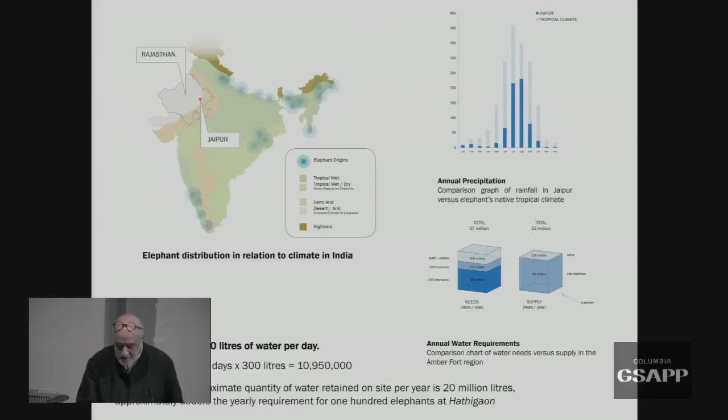So we made it a landscape project, and I think that's why we won the competition - we beat the drums on the idea that without water there was no point doing a project like this, because elephants are tropical beings, and for them to be in the desert climate of Rajasthan outside Jaipur was unbelievable. That was the site as we got it - there were some abandoned buildings which we finally integrated. We found the path of water through Google, and that was the site we finally colonized.

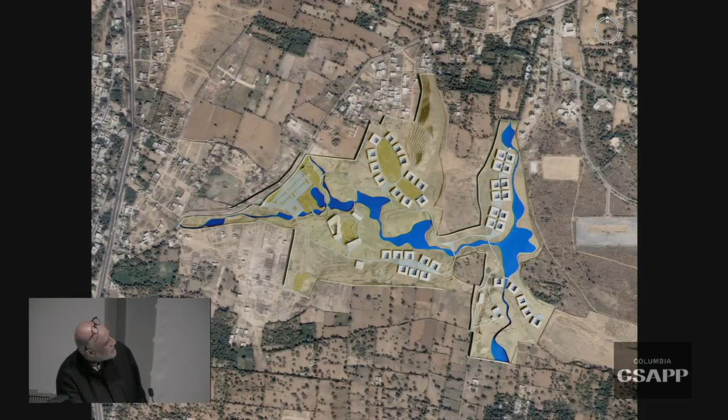We created a series of micro dams to capture water from different directions because of the topography, to create water bodies. This part isn't done yet - it's been finished up to there. And that's the site plan.

Many buildings - the brief was only houses for 100 elephants, but by repairing some of the buildings we said we should create a school, a visitor center, and other things we suggested, initiated by us as part of the project.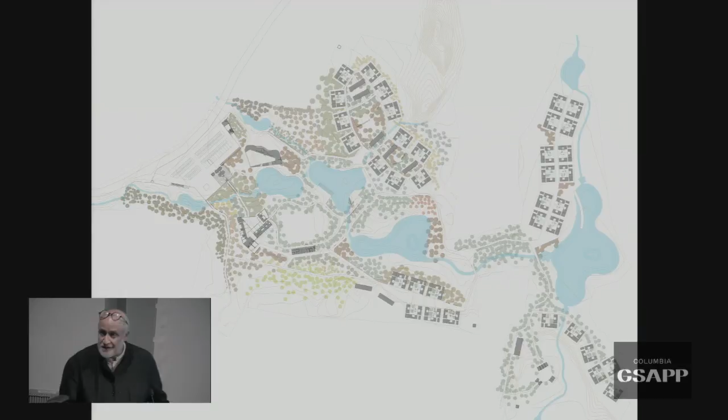In 2007, when we got the site, that's the same hill, and this is the transformation over 10 years. This happened in the first few years because the Public Works Department built the buildings - the kickbacks are in the construction. Landscape wasn't even a tendered item, which we had to struggle to fight for, to create these ponds etc. And then the government fell.

The BJP government, which initiated the project under a chief minister called Vasundhara Raje - a woman really well organized, very motivated - lost power. The Congress came into power, and as happens in many places, they abandoned the last government's project, so it was completely abandoned. That was frustrating - I thought, what the hell am I doing, how am I going to wait another 3 or 5 years for these guys to come back, if at all? But in hindsight it was fantastic because it allowed the landscape to generate.

No one lived there for 3 years, but the DNA, the bones were there, so the plants began to grow, and now it's completely green. We, of course, paid attention to the architecture.

They wanted row houses, but we did a cluster development instead. We made houses only 300 or 400 square feet with a little room for the elephant, but created a series of courtyards. So if 3 families got together, they actually had a mansion because they had a large public space which was their private space, with a wall surrounding it, courtyards for every house, flat slabs so they could build on the terraces and colonize it, and how it would mutate. The elephants have a separate entrance but participate in the courtyard, and those are the sort of rooms.

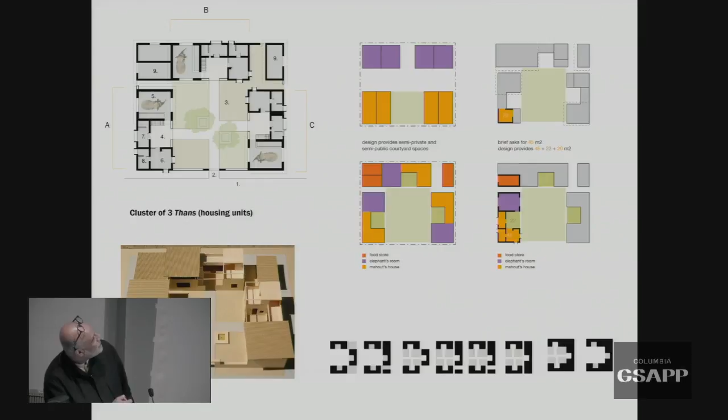These are just sort of drawings, and one reason I carried that resignation letter is every time I would send them beautiful details of stone gargoyles to celebrate how water is captured, I would go to site and find a PVC pipe instead. I would freak out, and the PWD engineer would look at me and say that even his own home doesn't have such details. So there was this whole hierarchy we had to understand.

In a state like that, it's very complex, and that's what made us keep fighting back, because we began to feel it could be a mission. The reason I didn't give them that resignation letter finally, like I threatened when I spoke here at Columbia 7 years ago, was because then one said, let's make it a mission, and I'm glad we did.

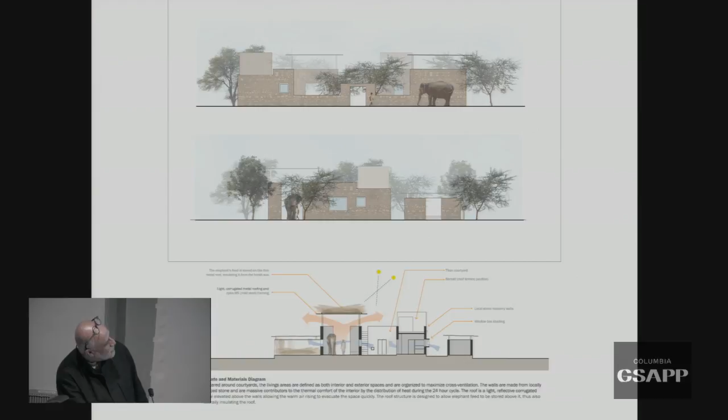That's the elephant's room, with a higher ceiling where they store the food, allowing cooling and ventilation - all these kinds of climatic principles. Elephants can't sleep on flat ground - they need a kind of berm depending on their size, otherwise they can't get up. So this is like our mock-ups to see what sizes would work for what elephants. I jokingly say this is my version of small, medium, large, and extra large.

This is what it sort of looked like, the first water body, that's Amber, where they go to work. These were the first clusters that got built, windows, so the kids—some of whom will become mahouts—could interact with the elephants, social space, but just things we anticipated would mutate. People would plaster, paint. Those were the expectations when they would be allocated.

This is a guy coming home now. You can see that slope. Different people treat their space differently because these weren't allocated. Basically, people started moving in, the government abandoned it, the new government didn't want to deal with it.

Some clusters flourished because of the water. So these guys have flowers, they sell flowers. They have lawns—this is the aspiration of the middle class in Jaipur. And the middle class in Jaipur have to get tankers of water because there is no water supply on a regular basis. So again, an unintended consequence.

And these were some of the abandoned ones where they hadn't allocated people homes, which the trees just grew. It began to become environments. And then as people moved in, life corrodes housing.

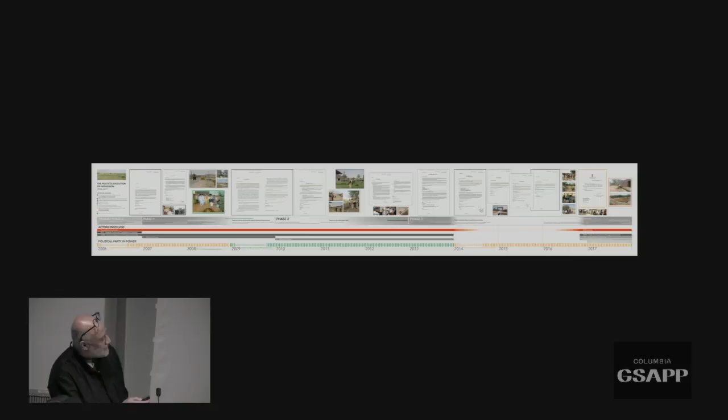Again, just in reflection, the fact that we made, I think, the right decisions in terms of supporting life there. Now, this is just, again, in summary. This is a mapping I did recently for an exhibition at the GSD. 2006 is when we won the competition. 2007, they begin to build those houses.

2008, a little more happens, and the government begins to dwindle here. It falls. The Congress takes over, and then the BJP government comes back to power.

This is the political system, these are the actors involved. We had the tourism department, the Amber Development Authority, the PWD. Every few months you can see the agency changed. Now we are finally with the Zoo Authority and the Forest Department, which I'll tell you in a second.

And so these are letters. I wrote a letter every month to the chief minister, whoever's in power, to make a case for this, which was incredible. In this period, when the new government came, I wrote some letters and got no responses. So I was frustrated.

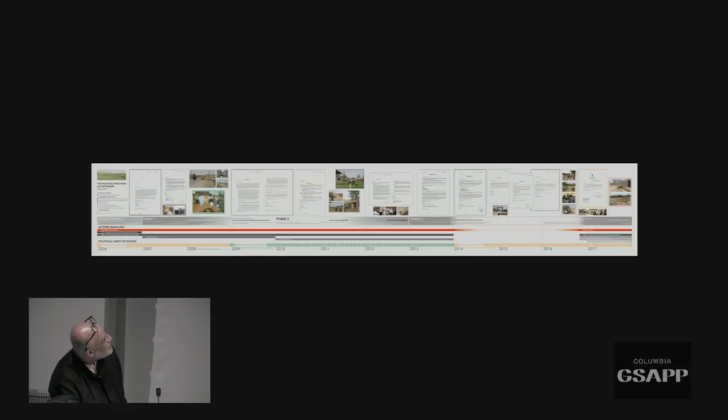Till then, we were at our own cost going to site every month just to keep working with the mahouts and the elephants, to keep that user group as part of our allies.

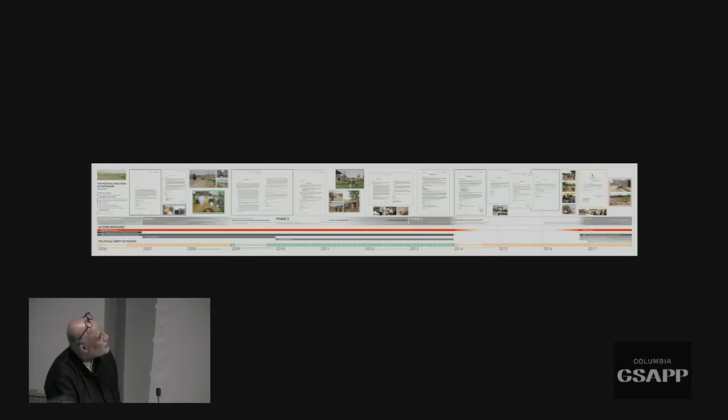Then at some point, out of the blue, with Glenn Murcutt as the chair of the jury, we got a gold medal from the University of Ferrara for the most sustainable project of the year. So I wrote to the chief minister with that certificate, and I said, you need to pay attention to this project.

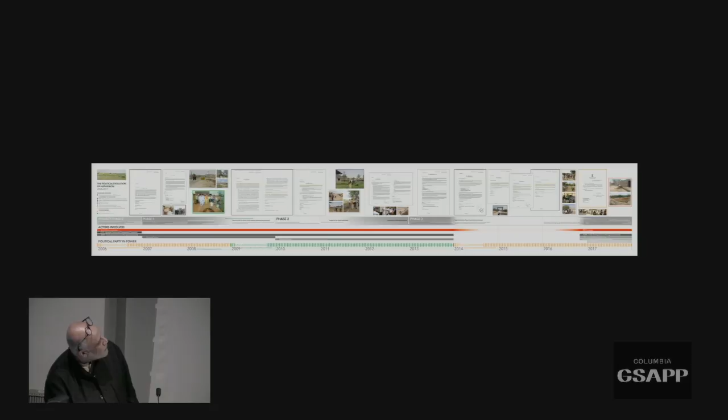This January, I got a call from her, met her, presented, and she's the same one who started the process. Finally, after being abandoned for 3-4 years completely, with trickles here and there, it was this kind of advocacy and lobbying, really our connection to the mahouts and the elephants, and a different kind of access to the chief minister that helped the project.

Because the animal activists were against the government, but because we had the elephants on our side, we could negotiate with them. That's how the Forest Department and the Zoo Authority have been brought in. It became a very complex set of negotiations.

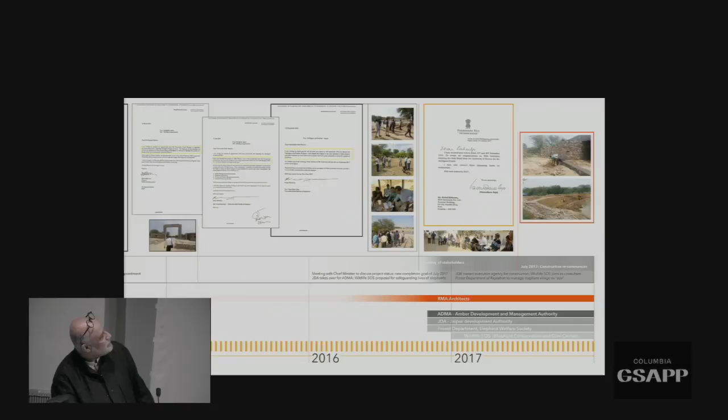This tells you that in more detail - all these elaborate letters making a case for it, writing to her and trying to get the project going. And finally, that's a letter from her on the government letterhead, calling me Rahul Ji with great respect and inviting me to make a presentation.

Then in 9 months, it's going ahead and finishing in December. It's unbelievable, but also because she's up for election in January and March, and in December the election code comes into play, so she can't spend money after that. So she's getting it completed. And of course, there's a deeper politic here, which I'm happy to share.

So in the last 3 months, these are things that have happened. The gateway in the Jaipur Pink - you can see all the planting done. Over 500 more trees have been planted just in the last 6 months. Pens have been created; these will all be covered with creepers and plants. This contains groups of elephants, and these are where they'll hang out with water troughs.

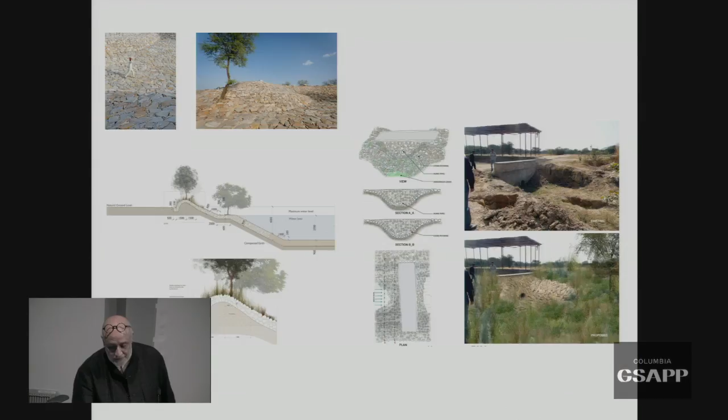So this is all under construction. As we speak, there are like 100 people working there. These are lookout spots, which will be heavily shaded, where groups can sit and be explained things about the elephants and their operation. We've now made proposals for swales to capture water, to stabilize berms. There's a lot of grass planting that's been done.

These are, again, natural local species. Many more of these pavilions have been built.

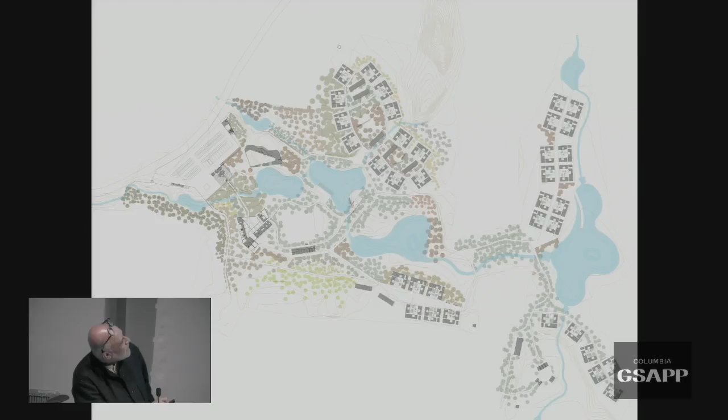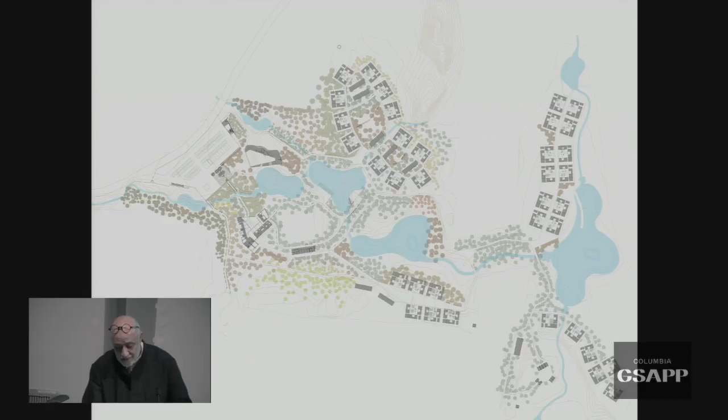Then, 6 months ago, we suggested to them that, right in the center here, we should do just a 4-room guest house. It's not a boutique hotel, but a place that people can actually stay at night and be at this sort of place and spend time. They accepted the idea, and it's under construction. It's been built, on one of these water bodies.

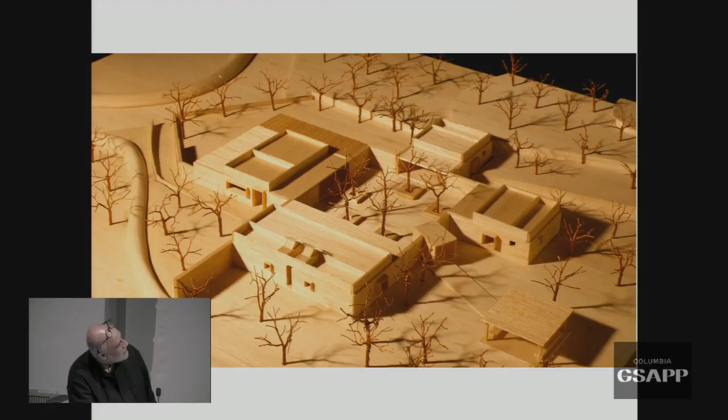That's what the model looks like. It's just 4 rooms and a dining facility around a courtyard, with a very discreet entrance from the rear overlooking the water. It's a very simple plan, all built in local material, large slabs of stone that make this portal to enter.

Just bamboo for the pergola overlooking the water bodies, and a courtyard where people can, if they spend the night having a scotch over dinner, it's very discreet, not in your face. It uses just these 2 simple materials and a little steel to span the floors to make the guest house, so it's very discreet.

What has also happened now is women from the government are working with the wives of the mahouts, and this is also going to create another source of employment, because the wives of the mahouts - and by the way, the mahouts are all from the Muslim community, a minority community in Rajasthan, so that's a very complicated dynamic - these women are going to run this guest house and choose what food is served there and actually maintain it. So again, it creates another form of employment.

It wasn't part of the brief, it just came up as an idea. The mahouts had many friends who were inmates in the local jail, and they said we should furnish it because these guys are really good with furniture. So these inmates produced all the beautiful furniture for the guest house. There's a kind of link.

I just got an email today that the guy who was really good with a particular kind of chair got released yesterday, so we won't have those five chairs because he might not do it.

Of course, now it's attracting a lot of birds. As people are getting allocated houses, Rajasthan has a great history of craft. They're beginning to decorate their houses, they're beginning to tell stories, and who knows, there'll be all sorts of narratives told through the architecture.